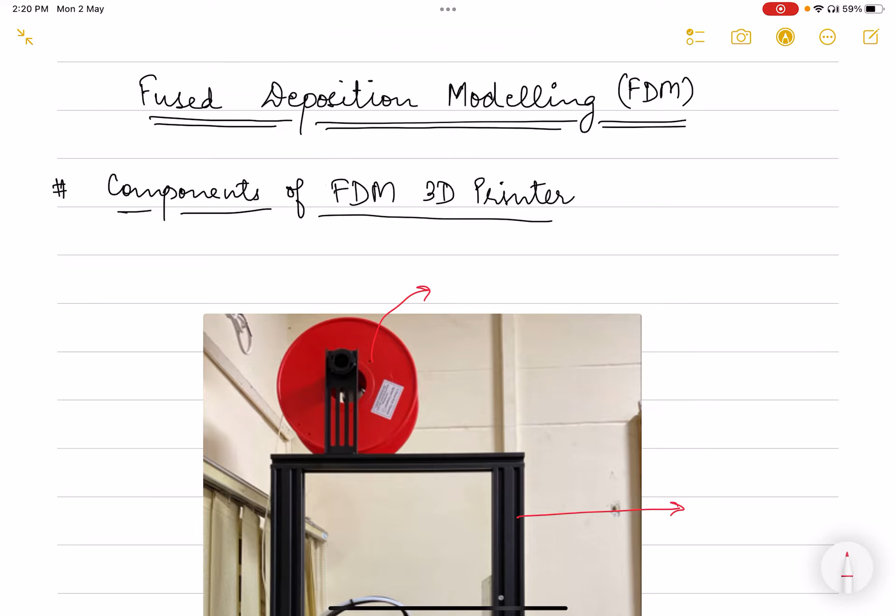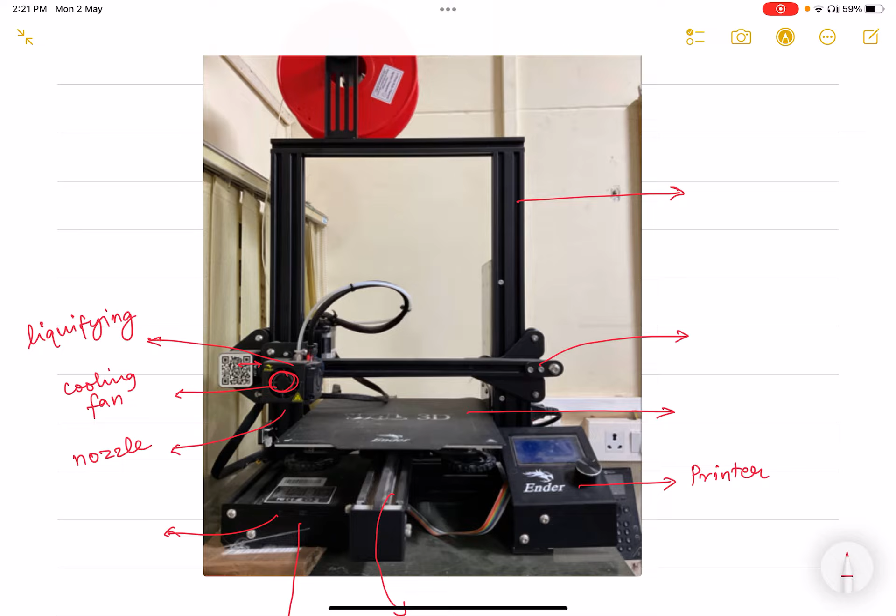As you can see in this image, this red spool is the filament. This is the printer screen from where you can control your print settings. This is a cooling fan. Here is the nozzle from which material is extruded, and above this we have a liquefying chamber.

This is heated, and here this plastic filament is changed into a molten state. This is a card reader slot which you can use to input your CAD files. Here is a USB port which can be used to connect this 3D printer to your laptop or any desktop system.

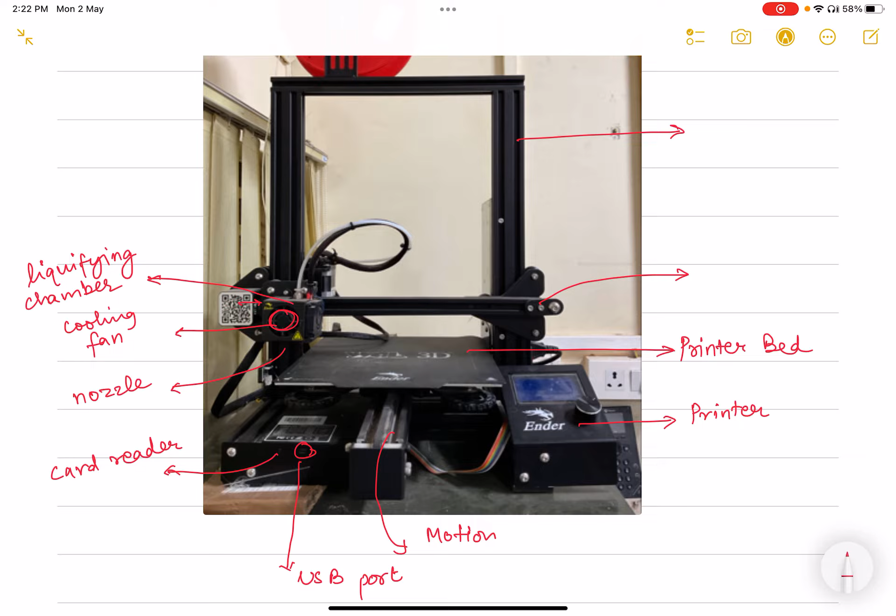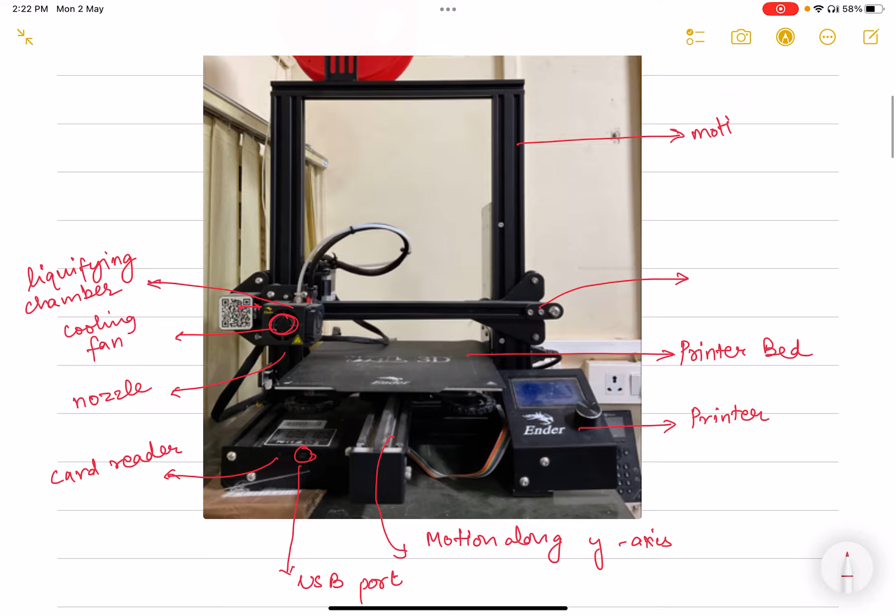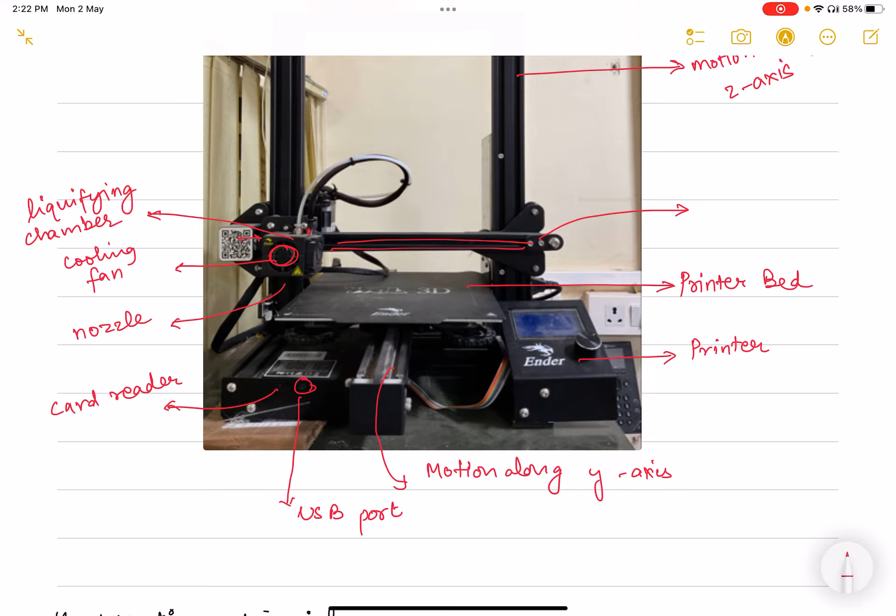Next is this printer bed. Here your 3D part is printed. This bed is also heated using a heater situated at the base of this bed. This belt mechanism is for the motion along the y-axis. These channels in the vertical bar are for the motion along the z-axis. And this particular bar and channel pulley system is for motion along the x-axis. This enables the 3D printer to move in all three directions, enabling us to make 3D objects with ease.

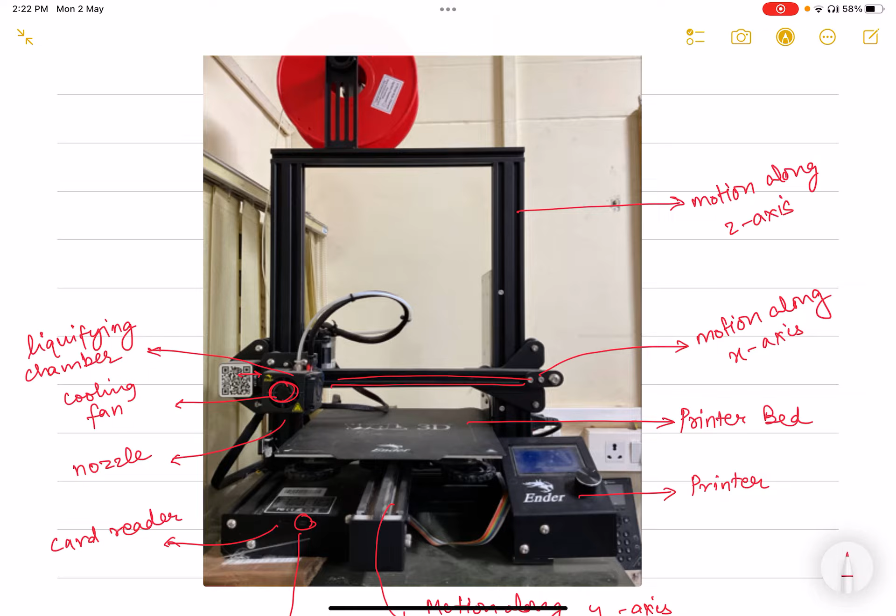Let us look into the working principle of an FDM 3D printer. First, a polymeric filament is fed using a pinch feed roller mechanism. Usually, the diameter used for this filament is 1.75 mm. This is more or less standard for all FDM 3D printers.

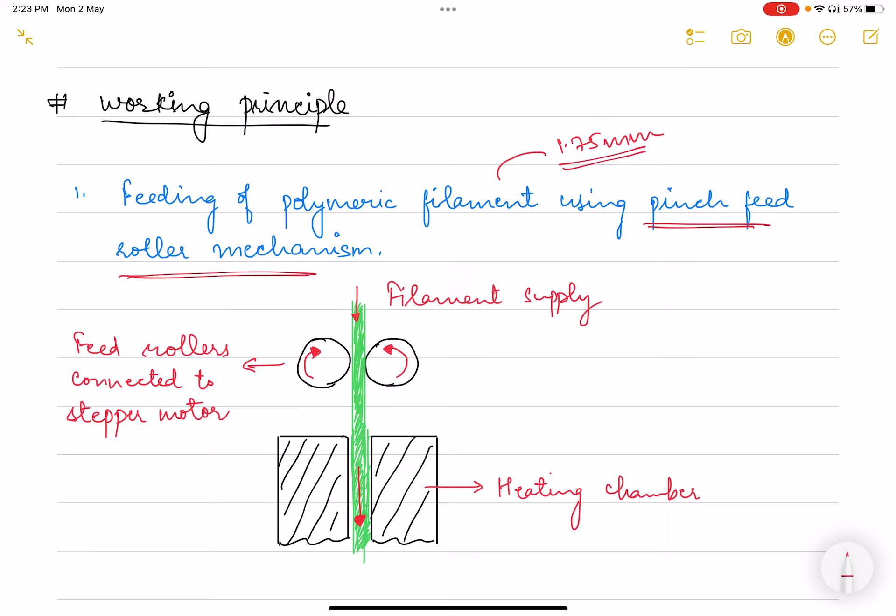So this filament is supplied and made to pass between two rollers. One of the rollers is connected to a stepper motor. This stepper motor provides motion to this roller and it rotates in the clockwise direction. This motion enables another roller to move in the anti-clockwise direction, thereby pushing the filament down towards the heating chamber.

This heating chamber has resistive heaters. These heaters create high temperatures in this chamber, which causes this particular filament to change from a solid state to a viscous molten state.

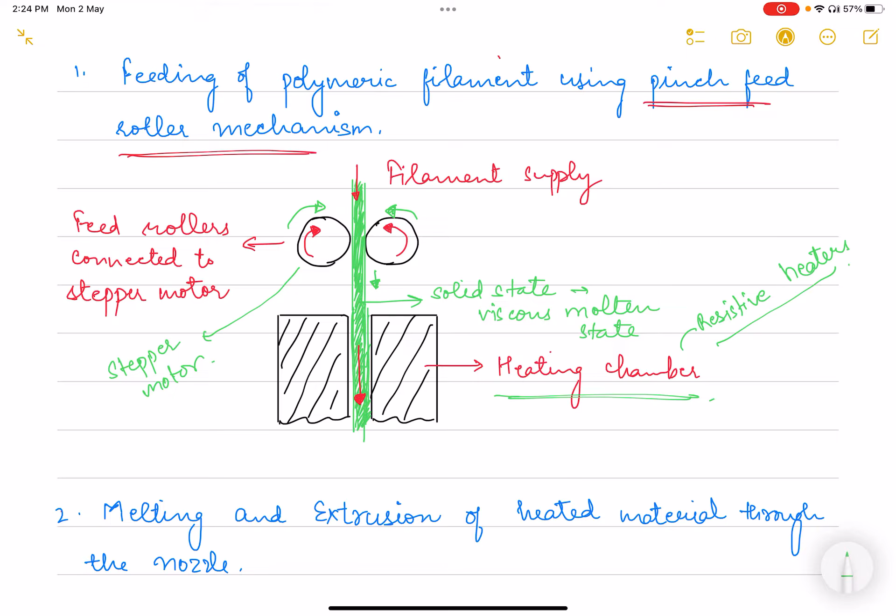Second part is melting and extrusion of the heated material through the nozzle. Now after this heating chamber is the nozzle. So these rollers provide pressure, and this heating creates another pressure which then forces the material out of this nozzle.

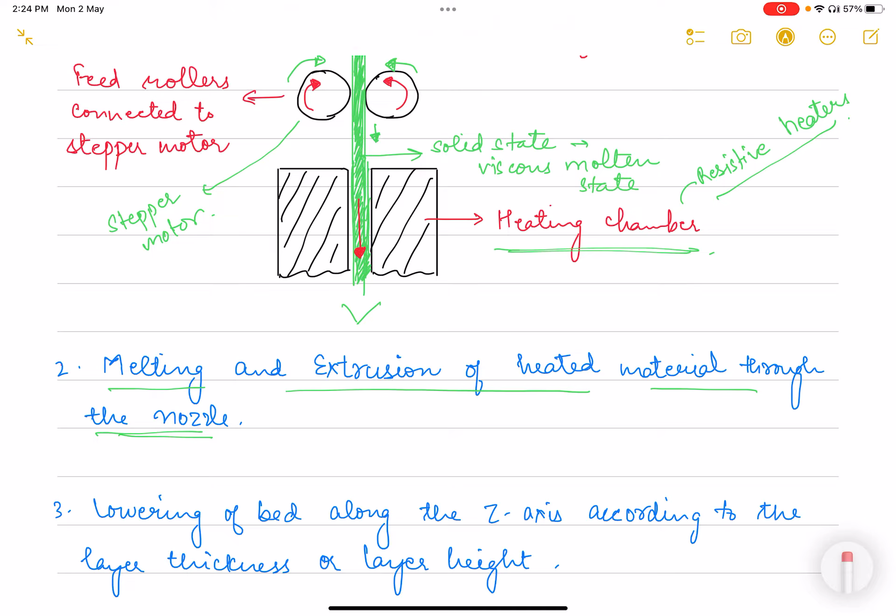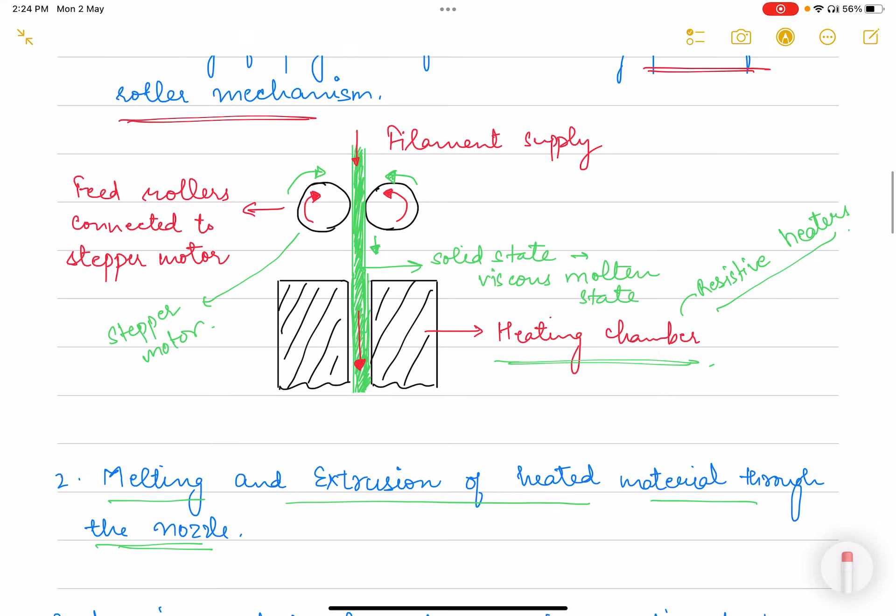Now the bed along the z-axis is moved, or the nozzle can move upward. So we have two options: either this bed can be moved lower down to enable printing, or this nozzle can be moved upward.

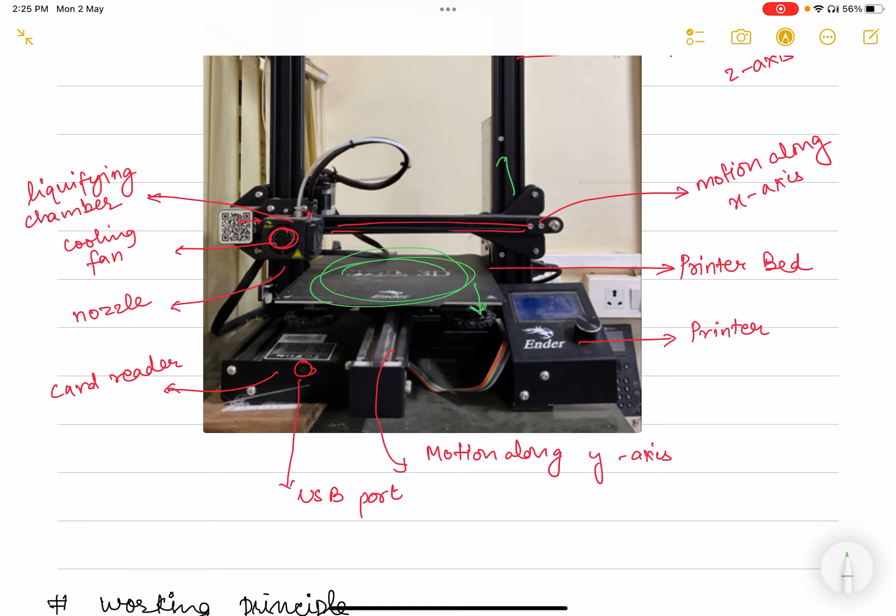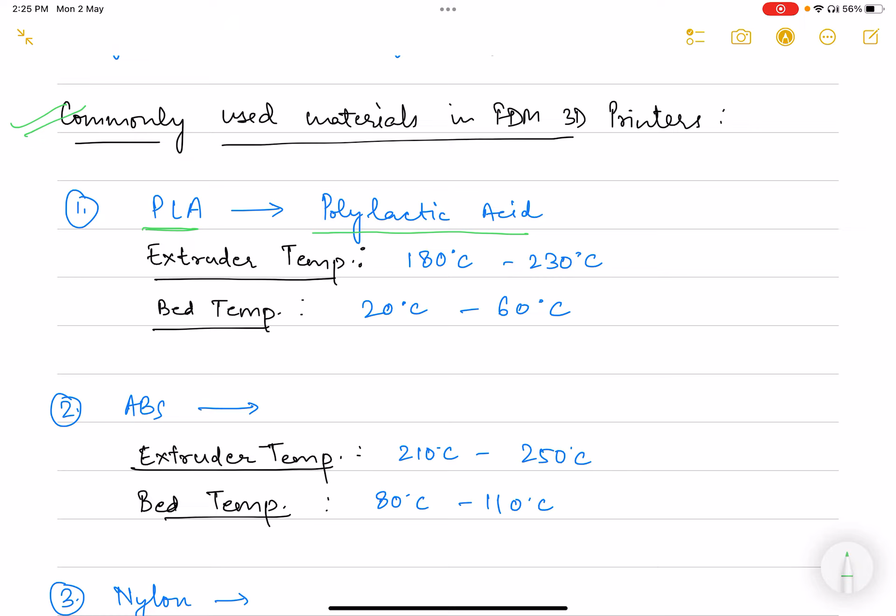Now let us see the commonly used materials in FDM 3D printers. First is polylactic acid, or PLA. There are certain specifications required to be maintained for efficient printing. For PLA, an extruder temperature of 180 to 230 degrees Celsius is necessary, and a bed temperature of 20 to 60 degrees Celsius.

So here comes the question, why does the bed need to be heated? The bed needs to be heated to avoid any warpages, since the filament or extruded material is at a higher temperature of around 150-200 degrees Celsius, and the bed is at room temperature. These sharp temperature gradients create distortion in the part. Hence, if the bed is heated, these temperature gradients are reduced and distortions are very minimal or even none. Here we can keep the cooling fan on.

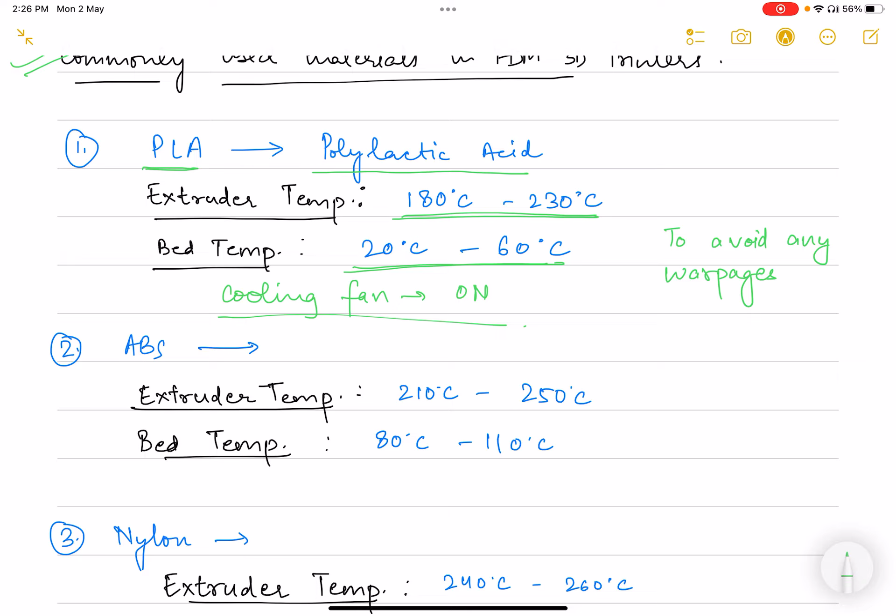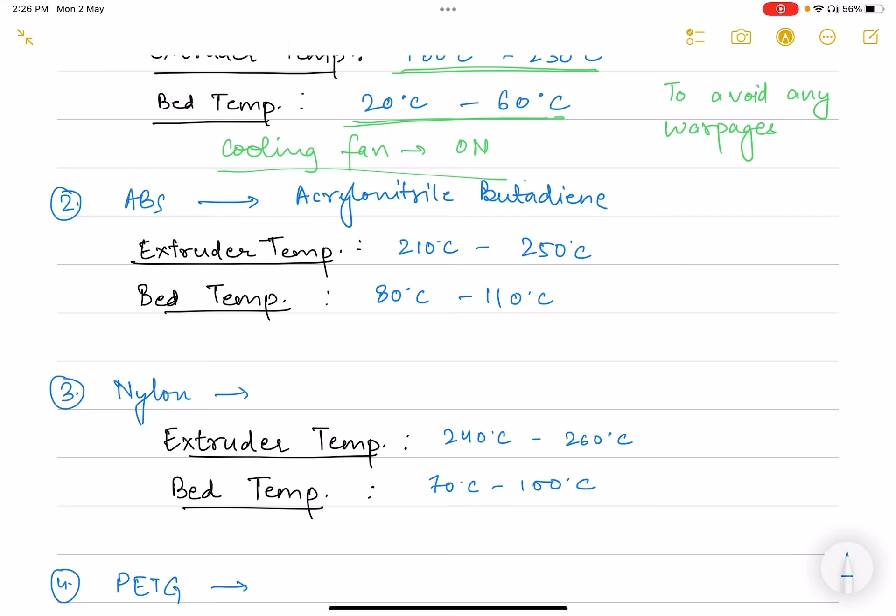Next is ABS. ABS is acrylonitrile butadiene styrene. For this, we need extruder temperatures of 210 to 250 degrees Celsius and a higher bed temperature of 80 to 110 degrees Celsius to ensure proper adhesion of the part with the printer bed.

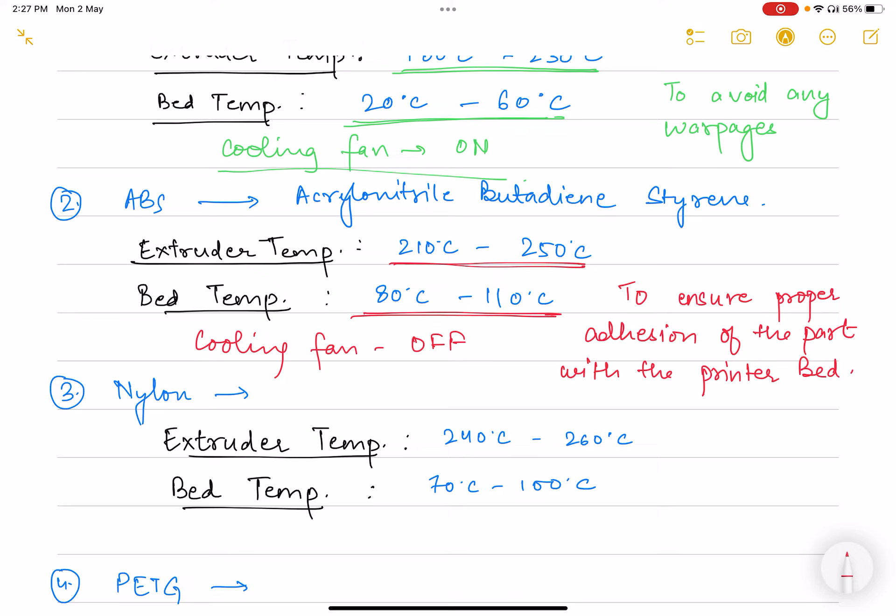Here, the cooling fan must be off. Next is nylon. Nylon is a flexible material that can be 3D printed. For this, extruder temperatures of 240 to 260 degrees Celsius are necessary, and bed temperatures of 70 to 100 degrees Celsius. Because of higher bed temperatures, the cooling fan should be off.

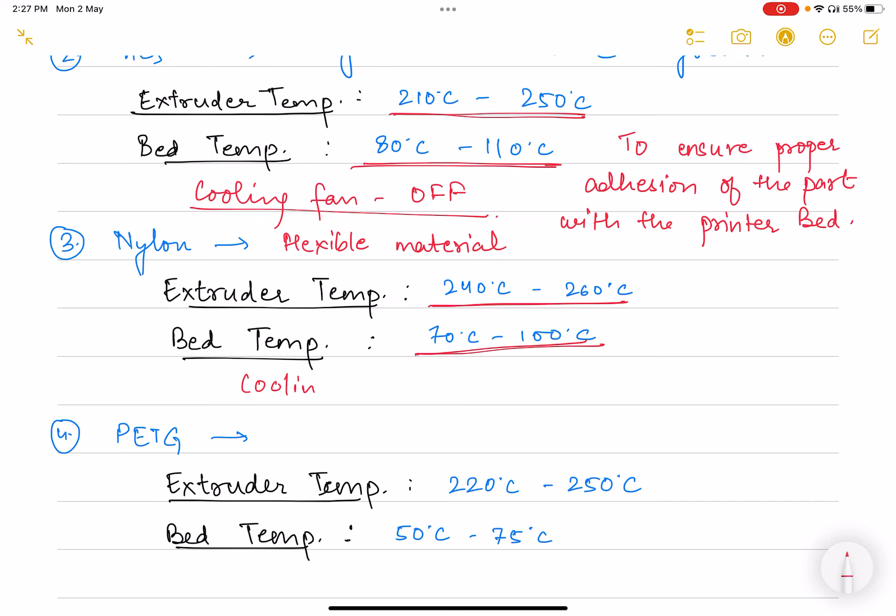Next is PETG. This is polyethylene terephthalate glycol. This requires extruder temperatures of 220 to 250 degrees Celsius, whereas bed temperatures of 50 to 75 degrees Celsius that are comparatively lower. Hence, the cooling fan can be kept on.

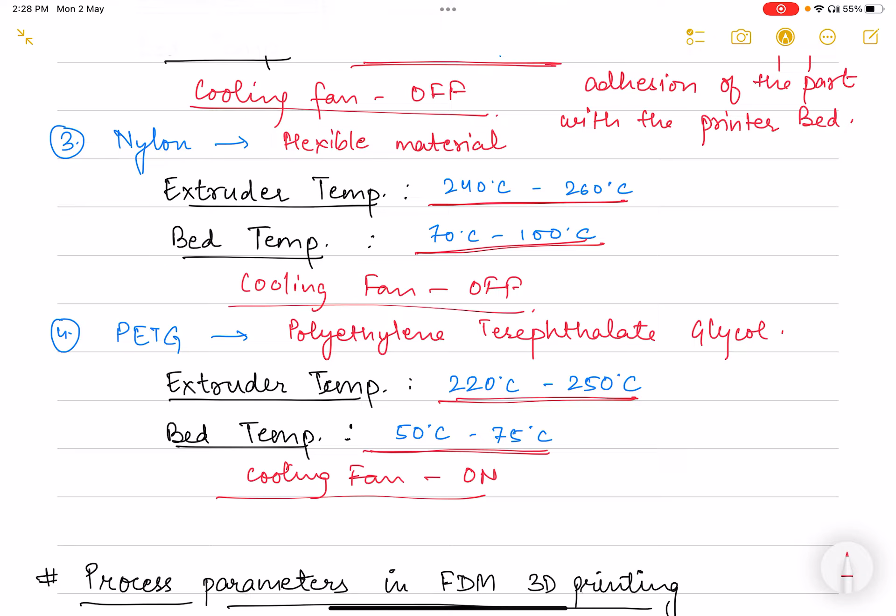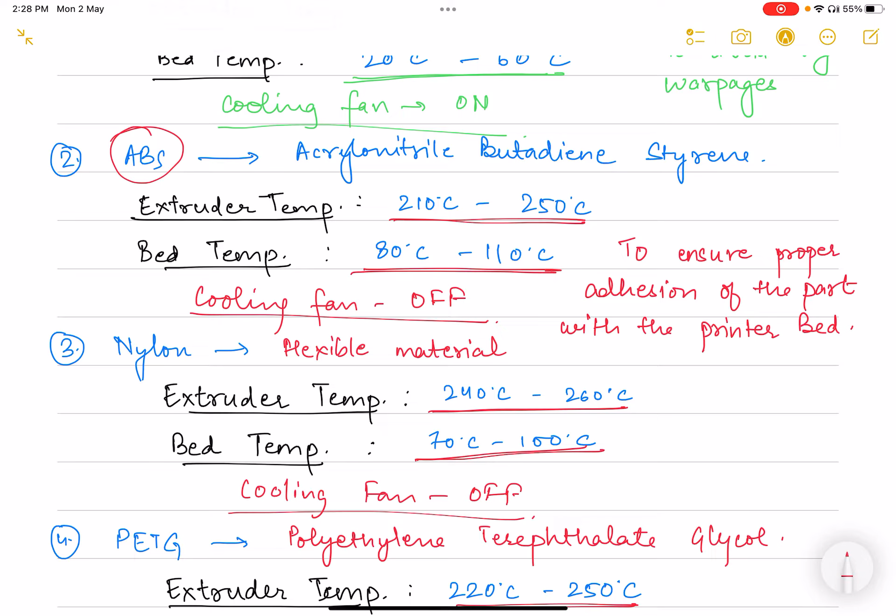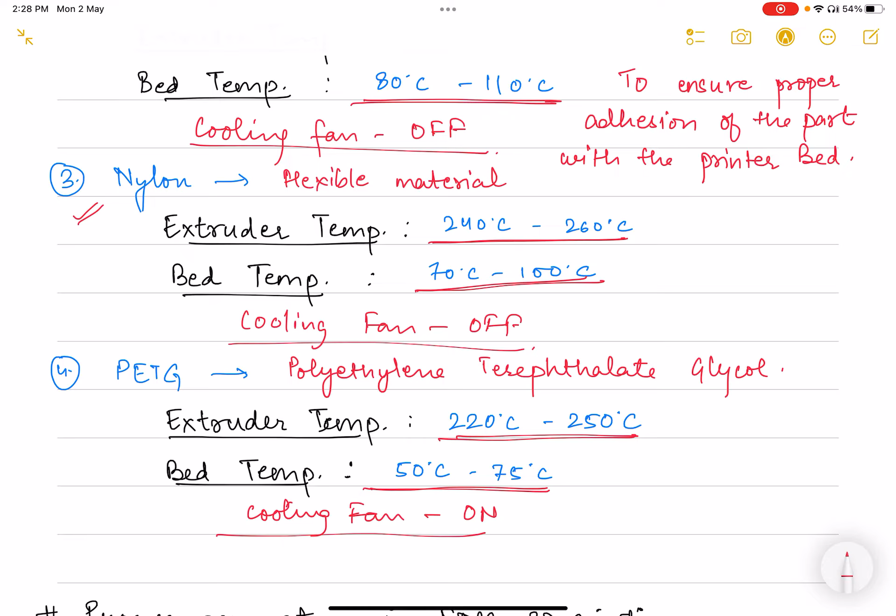Just to mention, ABS has certain problems and it keeps on sticking to the nozzle, requiring frequent cleaning. This problem doesn't occur in case of PLA. Nylon is also very sticky in nature and requires frequent cleaning of the nozzle.

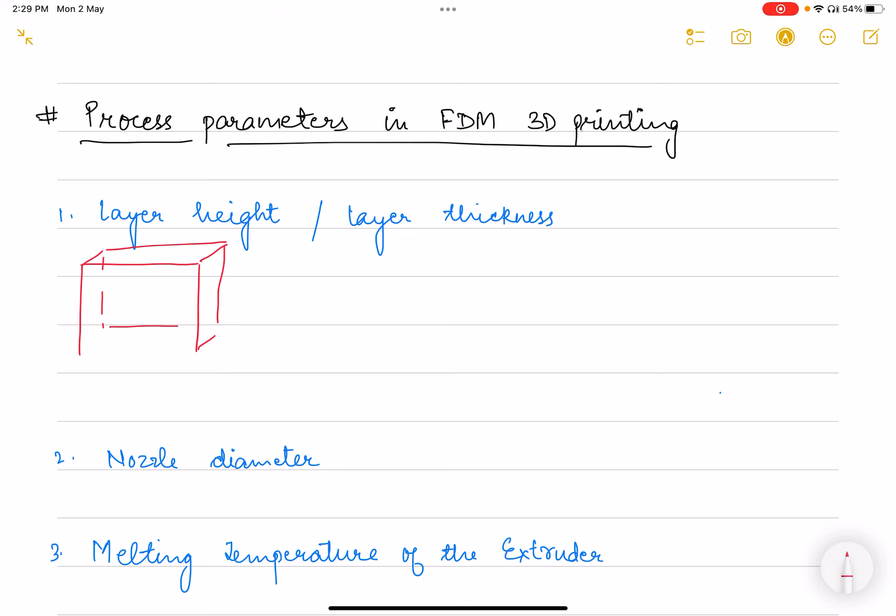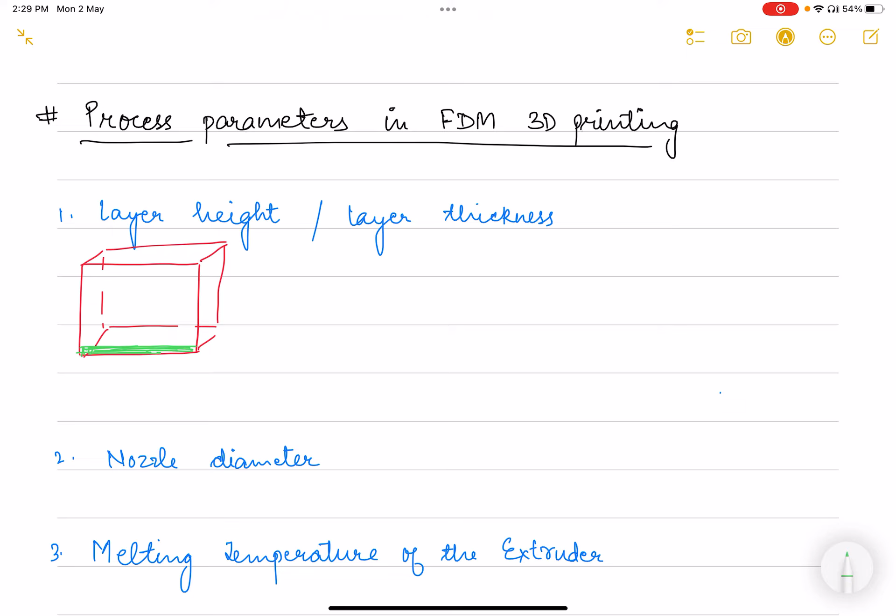Let us look at the important process parameters in FDM 3D printing. First is layer height or layer thickness. Suppose you have a cube that you want to 3D print. The height of the material that you can print in one go is your layer height. Suppose this is your layer height.

Layer height influences the strength of the 3D printed part, and there are certain criteria that need to be maintained. Layer height should always be less than the nozzle diameter.

Why is it so? Suppose your nozzle diameter is 5 mm. When you lay down the first layer, because of the nozzle diameter being 5 mm, the filament that is extruded also has a diameter of 5 mm. Now if your layer height is higher than 5 mm, suppose 6 mm, the nozzle will move a distance of 6 mm upward and then start to print again. As a result, there is an air gap in between, leading to inefficient printing, or it won't print at all.

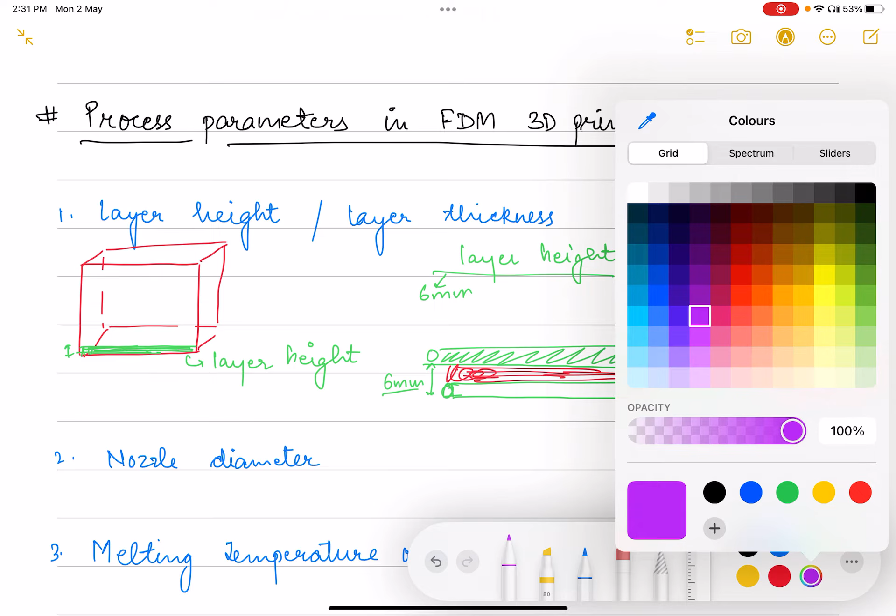If your layer height is lower than the nozzle diameter, then the nozzle will move a distance less than the diameter of the nozzle. The nozzle will press the initially extruded molten material, flatten the upper surface, and spread over a layer of material. This ensures surface contact between consecutive layers, thereby ensuring good bonding.

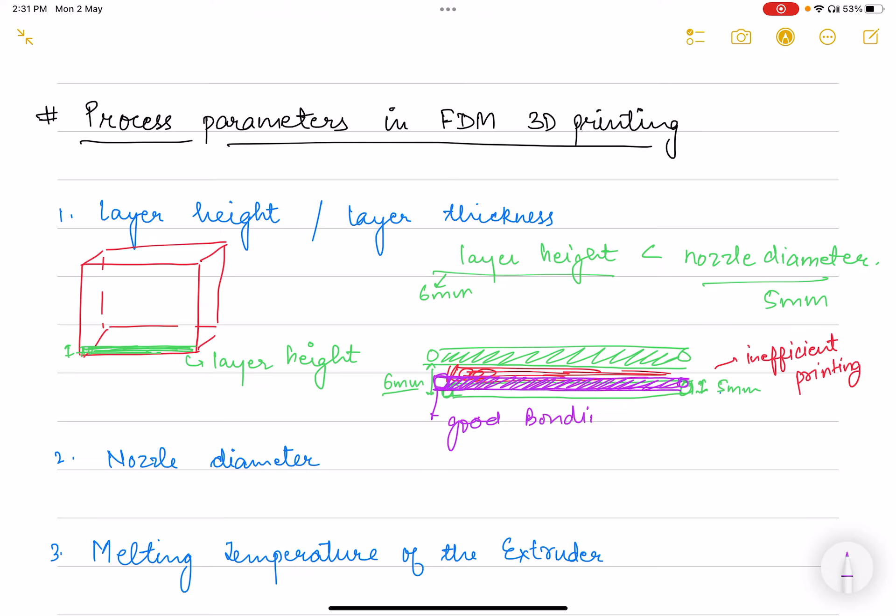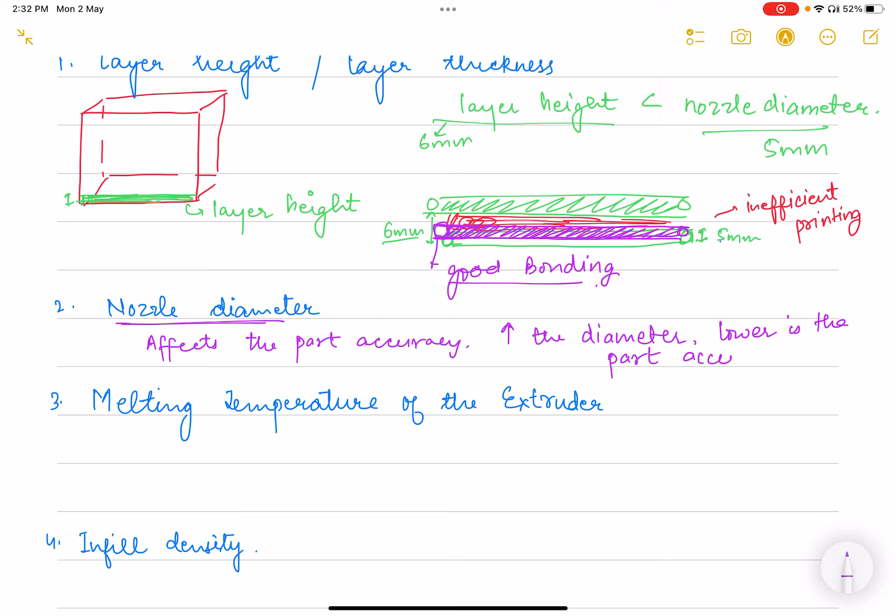Next is nozzle diameter. Nozzle diameter affects part accuracy. Higher the diameter, lower is the part accuracy, and lower the diameter, higher is the accuracy.

Next is melting temperature of the extruder. This affects the viscosity of the molten material, which in turn affects the flow properties and ultimately the surface finish of the printed part.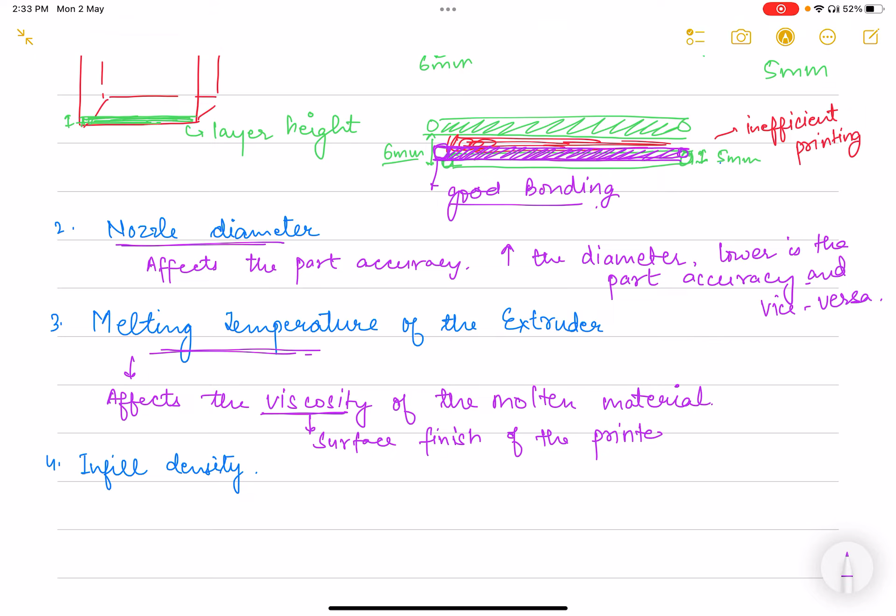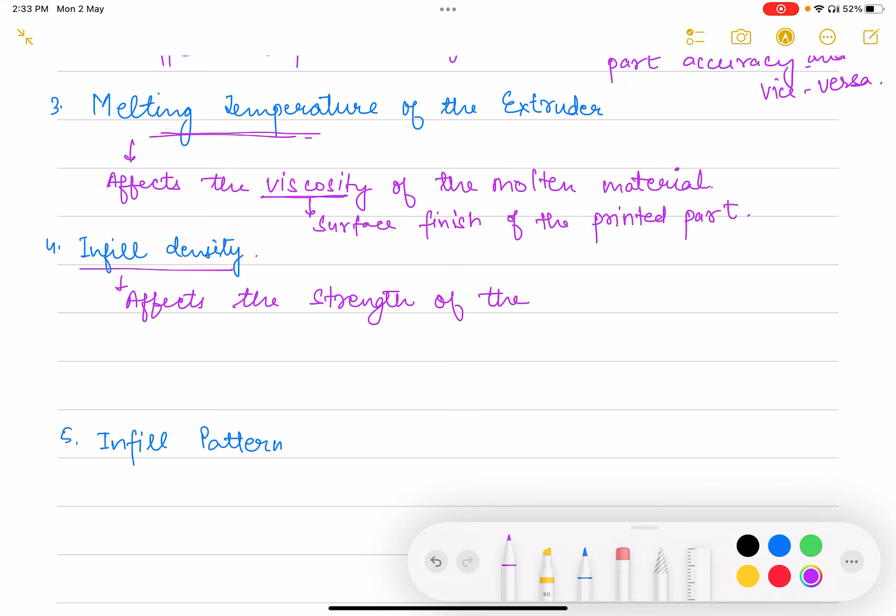Next comes infill density, which affects the strength of the 3D printed part. Infill density can be defined as the amount of volume that is being filled by material. It can be varied from 1% to 100%, which is a fully dense material. Higher the density, higher is the strength.

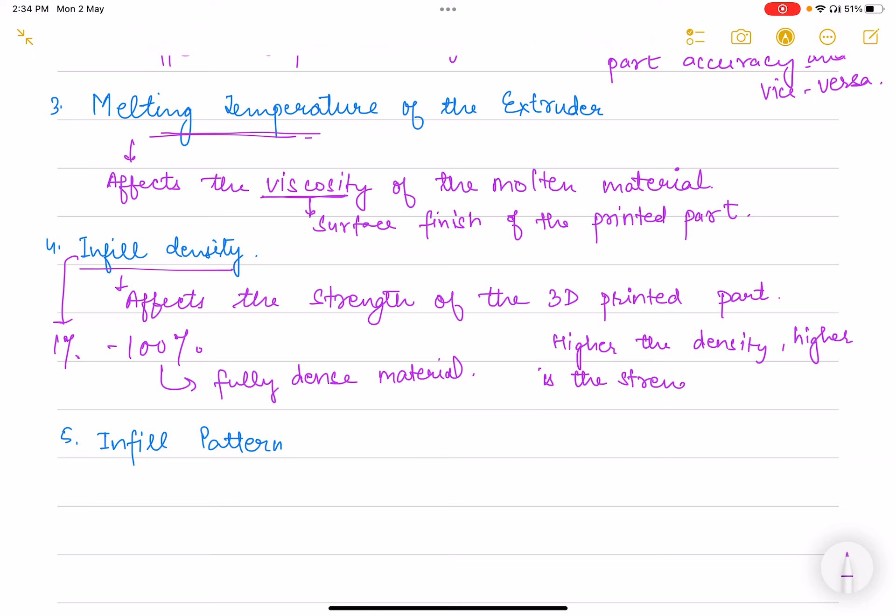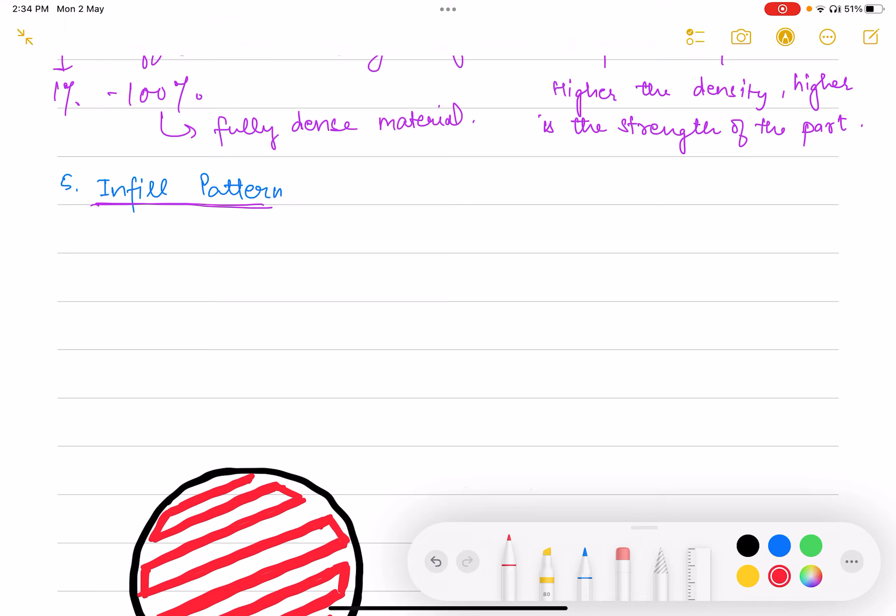Next comes infill patterns. There are multiple infill patterns available in the slicing softwares used to create the G-codes of the parts. One is lines, where the part is simply made of lines like this. Next is cubes, where the part is made of cubes, giving structures like cubes or squares.

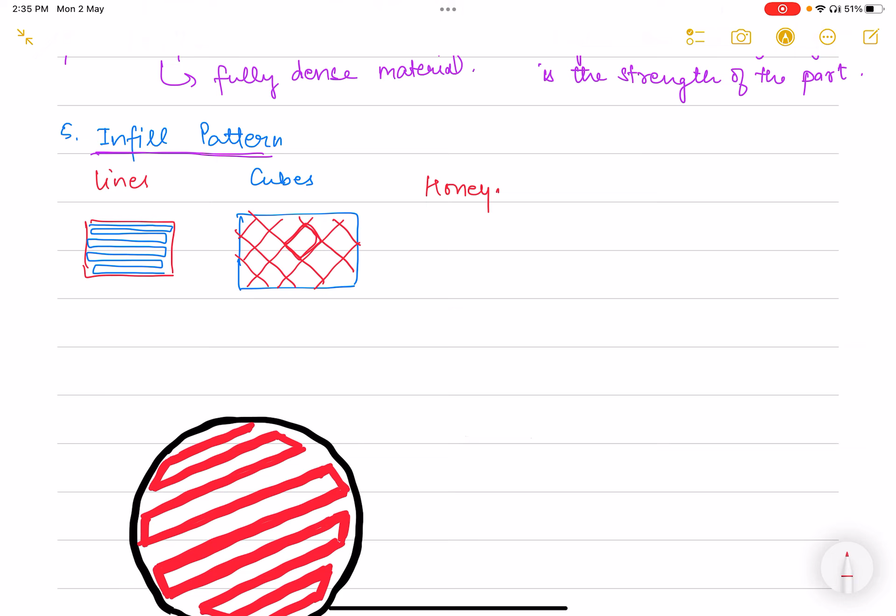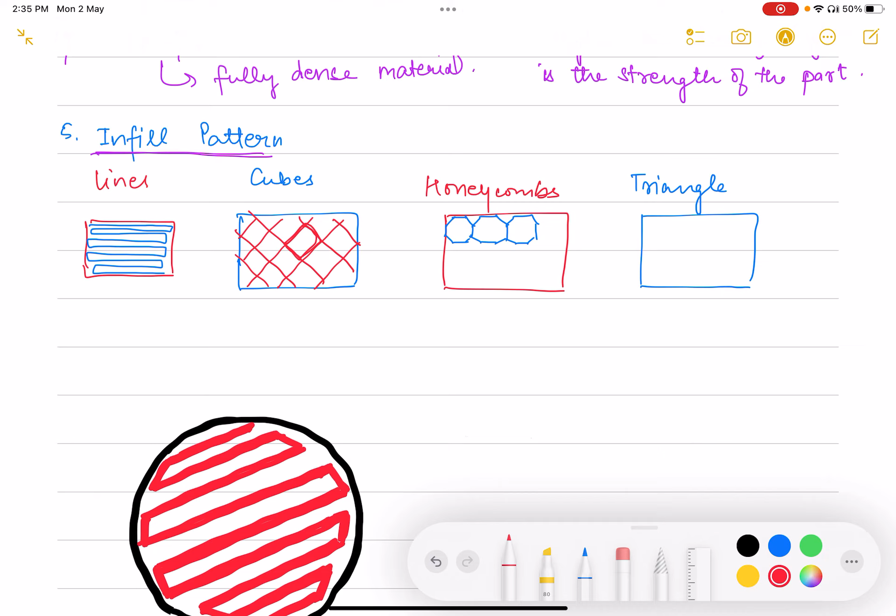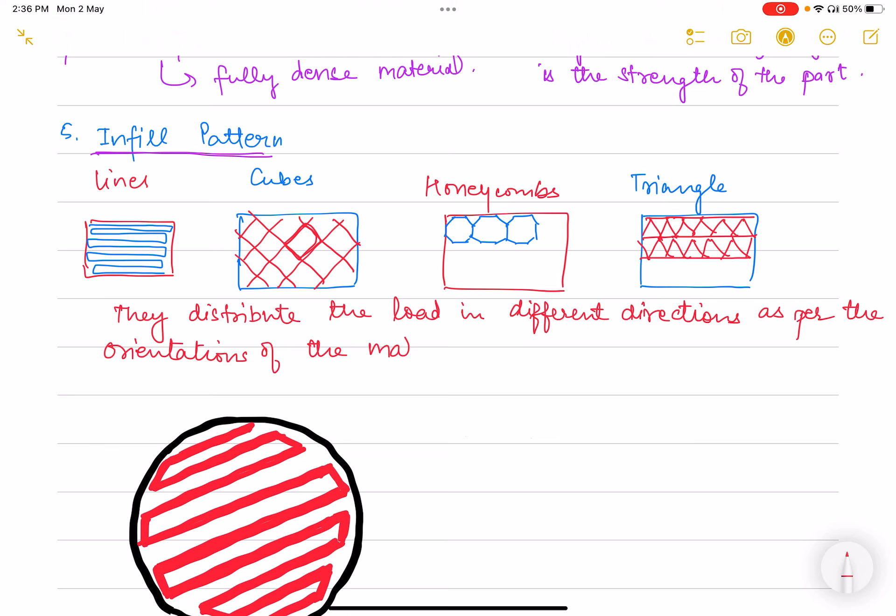Next comes honeycombs, which gives structures like this. Next comes triangles, which can go all along the structure in multiple varieties. These infill patterns distribute the load in different directions as per the orientation of the material. Hence, we get different strength characteristics depending on the different infill patterns. There are many more patterns available.

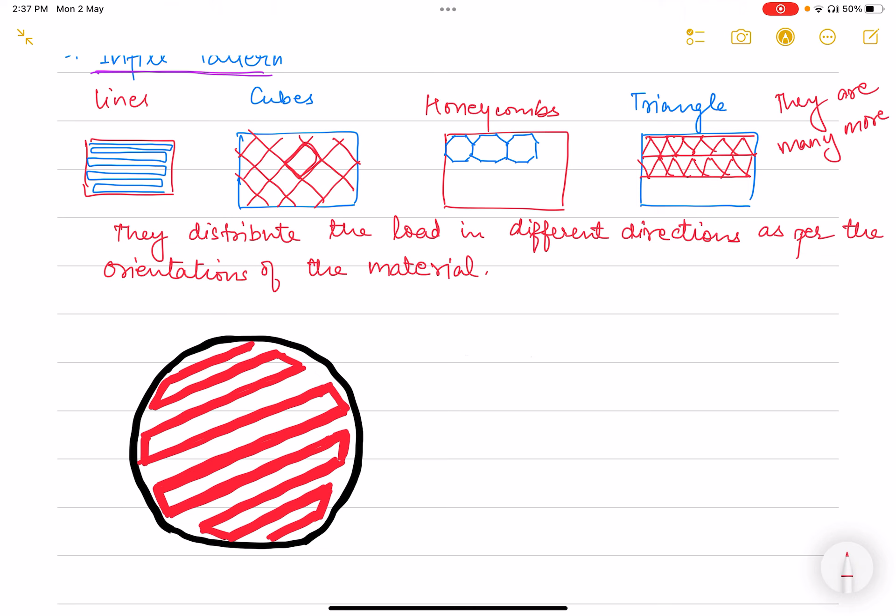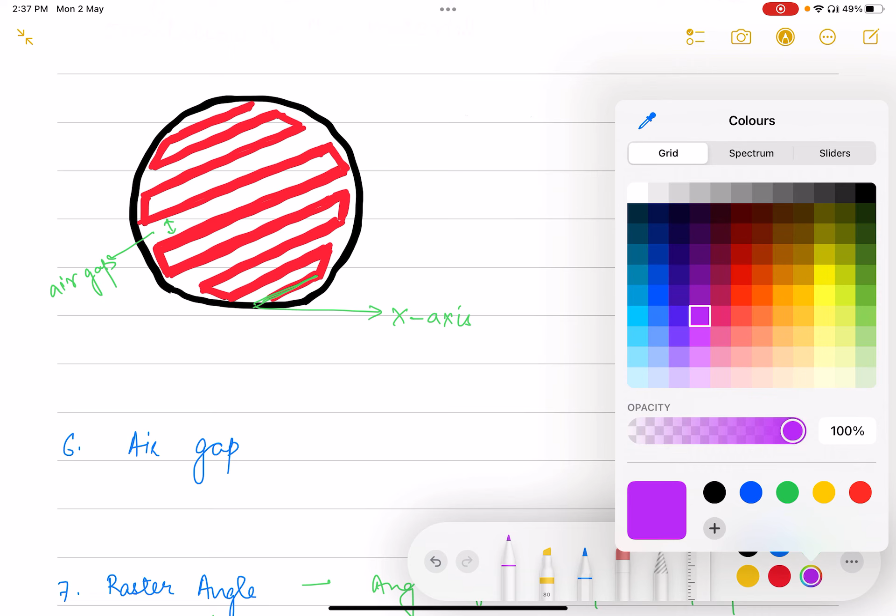Next is air gap, the gap between two consecutive lines. Next is the raster angle, which is the angle of the printed or deposited material with the x-axis. Suppose this is the printed material and this horizontal one is the x-axis, so this particular angle is the raster angle.

This also plays a role in strength. As one of the studies done by me has found, when the raster angle is at 60° or 30°, it has higher strength.

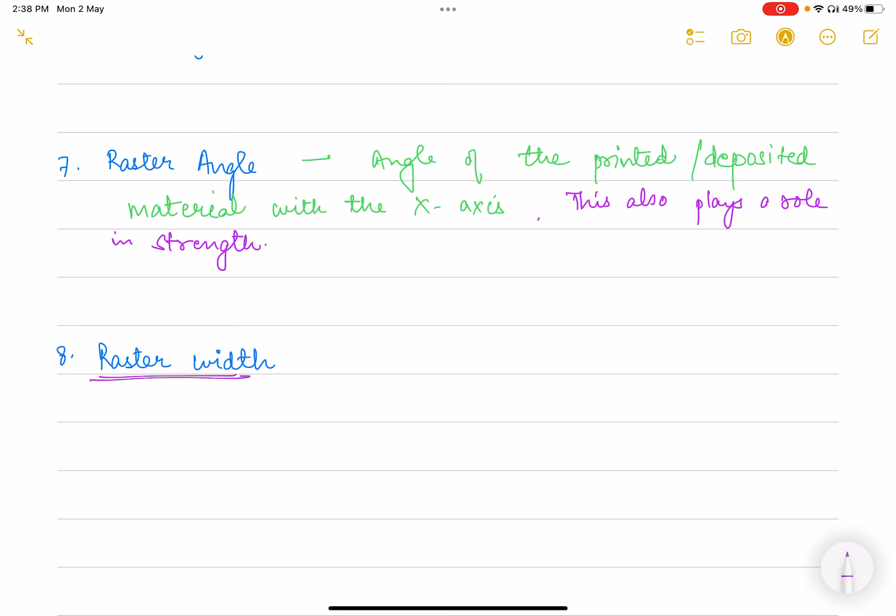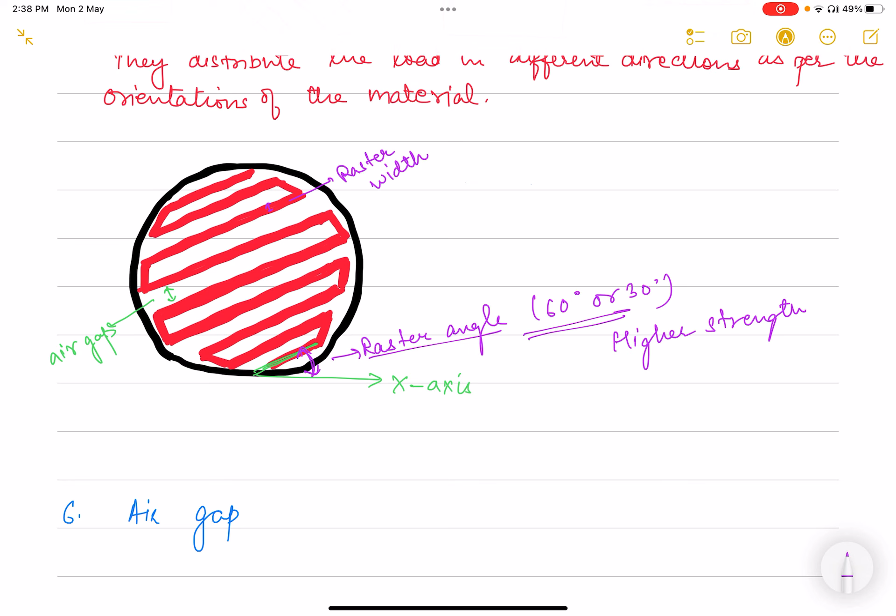Next is raster width, which is the width of the printed material. This depends directly on the diameter of the nozzle.

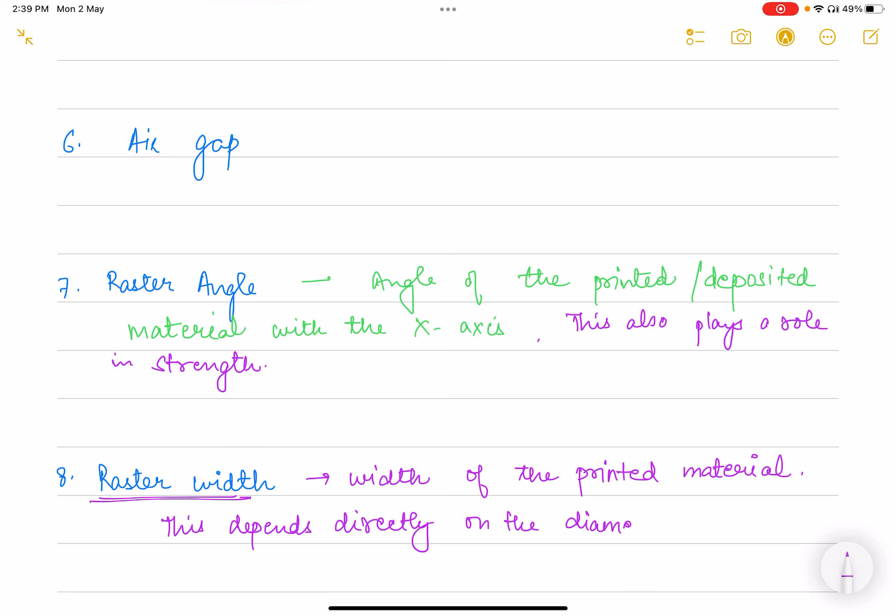So these were the important parameters to be considered during FDM 3D printing. I hope FDM 3D printing basics are clear to everyone. Thank you.